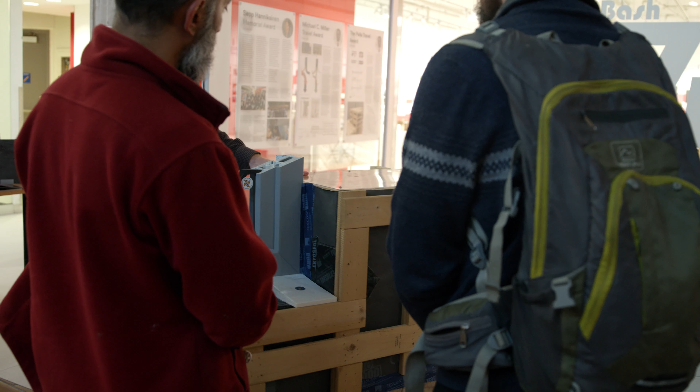Today, I'll be presenting some of my master's research, evaluating Energiesprong retrofits for solid masonry townhomes in Toronto.

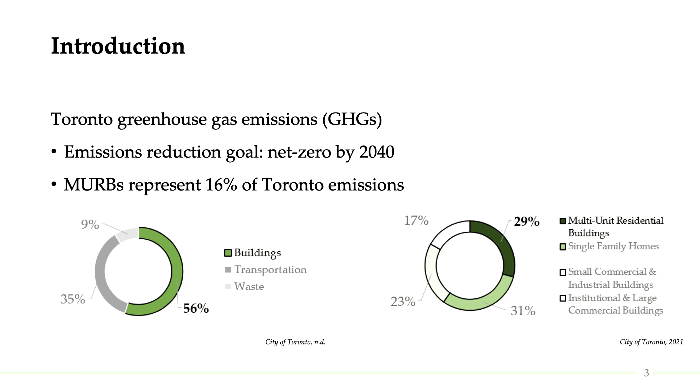From the building sector's consumption, primary energy consumed stems from necessities such as space heating, cooling, and ventilation. The energy sources for these uses are generally either electricity or natural gas.

In 2019, 92% of the province's electricity was produced by non-fossil fuel sources, primarily by nuclear generation, which accounted for 59%. However, nuclear-generated electricity production will slow significantly in the coming years, as many of the province's nuclear generating stations require refurbishment or are at the end of their service life.

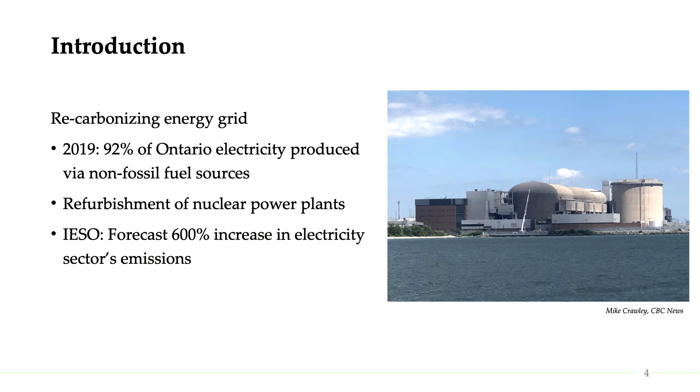The Pickering nuclear generating station shown here is a prime example, as refurbishment will stop its energy generation, thus negating the 14% of Ontario's energy it would normally supply.

Putting this all together, what could this mean for the City of Toronto? The building sector is responsible for such a significant portion of the city's GHG emissions that it's evident one target area to focus on is the building sector's energy consumption. Unless this is done, there is a risk of the Greater Toronto Area's emissions increasing by 2.25 megatons of CO2 equivalents per year. This will undoubtedly represent a step backwards in Toronto's path to net zero.

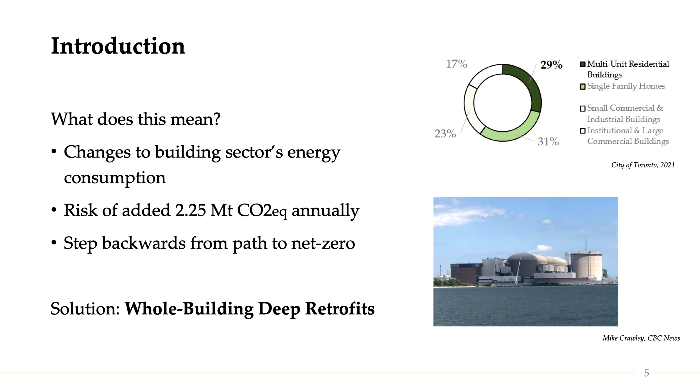So what's one possible solution to consider? You all know it, it's deep retrofits. I know I'm preaching to the choir, but let's talk about deep retrofits for a second. To reduce the amount of energy consumed from the built environment, deep energy retrofits are often implemented to improve a building's performance.

Typically, deep energy retrofits target energy consumption reductions of at least 50% or more. However, widespread adoption of deep retrofits has been limited because of factors such as extensive disruptions or high costs. On the other hand, conventional retrofits often include partial renovations or isolated upgrades to the building, achieving up to 25% energy consumption reductions. These smaller scale retrofits are usually prioritized by the general population due to shorter payback periods and limited disruptions to the occupants.

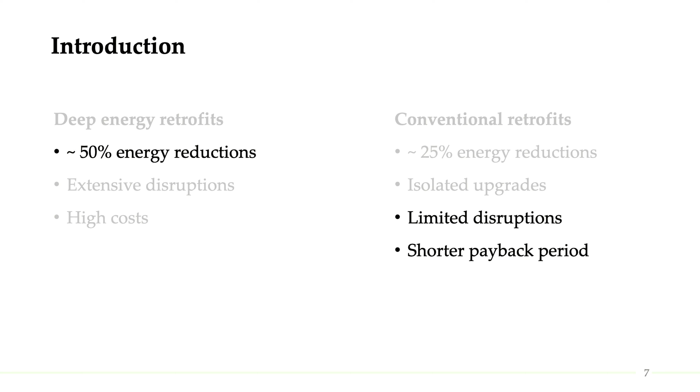In the end, significant and extensive improvements to our existing building stock must be completed to reduce our greenhouse gas emissions. The question then is, how can we prioritize a bit of both of these strategies, maximizing energy reductions while limiting occupant disruptions and creating economies of scale over time?

Enter the Energiesprong retrofit strategy. Energiesprong was started in the Netherlands with the overarching goal of industrializing the deep energy retrofit process at low financial cost while providing a high quality product.

This accelerated retrofit strategy utilizes prefabricated panels to enclose buildings in a super insulated envelope to reach net zero energy levels of performance with renewable energy systems. Given its prefabricated nature, on-site labor for an Energiesprong retrofit can generally be completed in 1 week of work, all the while remaining primarily on the exterior of the building, thus minimizing occupant disruption.

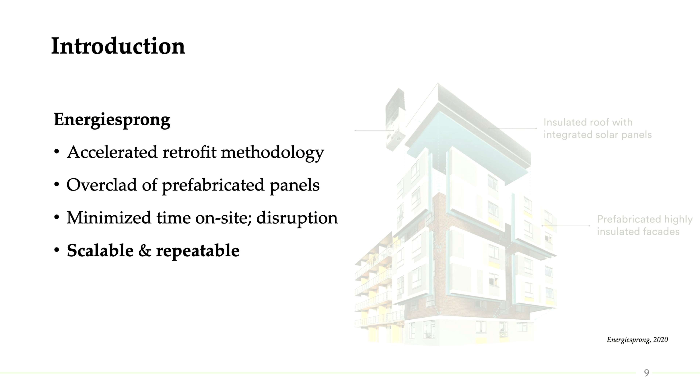The Energiesprong methodology, which has become popular in Europe, could serve as a basis for an existing building retrofit framework in Toronto that is both scalable and repeatable, crucial characteristics of the needed retrofit strategy for the city to reach its net zero goals. The Dutch Energiesprong model initially used social housing as its target market, the success of which could potentially be carried forth in Toronto.

Toronto Community Housing, the largest social housing provider in Canada, has a portfolio well suited for large-scale implementation of an innovative deep retrofit strategy. More specifically, TCH's low-rise solid masonry archetype lends itself towards panelized retrofits, as few geometrical variations must be accounted for, meaning they're simple box buildings. Furthermore, their existing low-rise MURB stock already requires significant repair and maintenance. The TCH portfolio could therefore serve as an ideal candidate for the beginning of mass Energiesprong retrofits in Toronto.

However, the overclad of solid masonry buildings would require proper study, as the masonry properties could significantly alter the wall's hygrothermal performance post-retrofit. This would not only impact the structure's durability over time, but poor hygrothermal performance of the envelope could result in loss of energy saving potential, as well as affect occupant health.

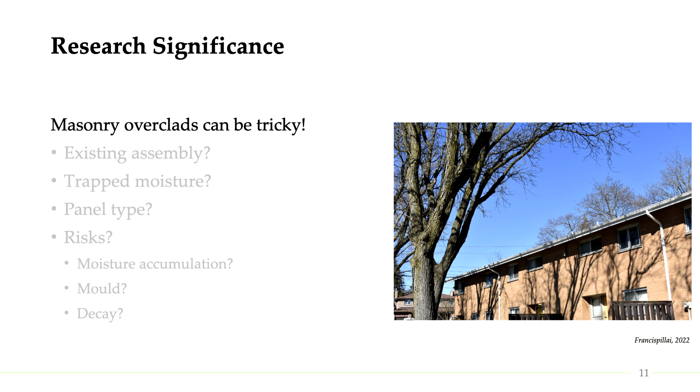There are many factors at play in this kind of retrofit, some of which are listed right here. Given the significant stock of this building archetype, it's important to know what kind of overclads are feasible and which ones are not. With all of this in mind, the following question guided a portion of my research.

How do masonry moisture storage, initial moisture conditions, and panel type affect the performance of panelized retrofitted wall assemblies for low-rise solid masonry residential buildings?

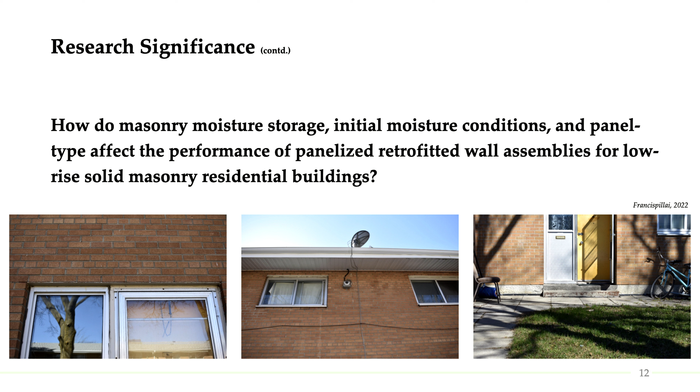The objective of this research was to help inform both Toronto Community Housing as well as the industry of the potential consequences of retrofitting solid masonry buildings using panelized approaches if various conditions are not accounted for adequately.

This would be demonstrated through the creation and testing of a hygrothermal performance sensitivity analysis methodology on a pilot building, namely a TCH low-rise solid masonry townhome.

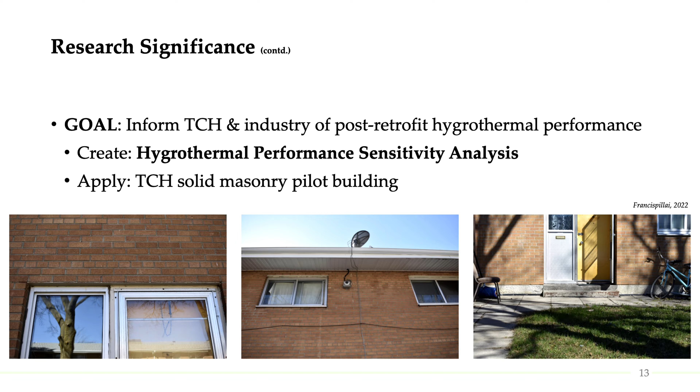All right, I know I spewed a lot of information, so let's do a quick recap. Toronto wishes to hit net zero by 2040. We therefore need to reduce our greenhouse gas emissions from the building sector, namely in MURBs.

TCH has a large stock of buildings that could be targeted, many of which are low-rise solid masonry ones. To both reduce costs of retrofits while limiting occupant disruption, the panelized Energiesprong approach should be considered. However, as with any retrofit, hygrothermal performance is of crucial importance for masonry retrofits. This is where the significance lies for the hygrothermal performance sensitivity analysis methodology that we created here.

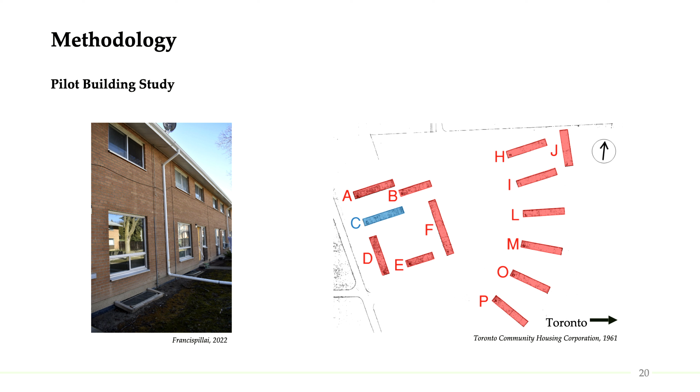So let's talk about the pilot building a bit. The building used as a test subject for this research is a 6-unit, 2-story townhome located west of Toronto. The pilot building, Building C, shown on the right, is a very similar design to that of a community surrounding it that belongs to Toronto Community Housing. The overall geometry of the building is quite simple, box-shaped with flat exterior walls.

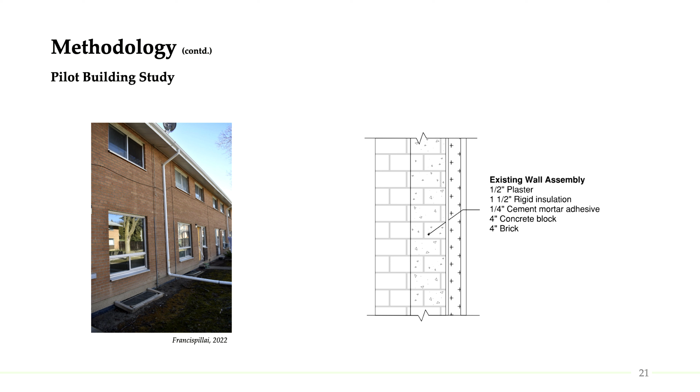The wall buildup is shown here and includes a half inch of interior plaster finish, 1.5 inches of rigid insulation, a quarter inch of cement mortar adhesive, 4 inches of concrete block, and a 4-inch brick finish.

To better understand the effects of panelized retrofits on solid masonry buildings, a methodology was created for modeling various overclad wall assemblies to analyze hygrothermal performance post-retrofit. The first step of the methodology is to define and understand the existing assembly being studied. In our case, the existing assembly is a solid masonry wall with a face brick and block backup.

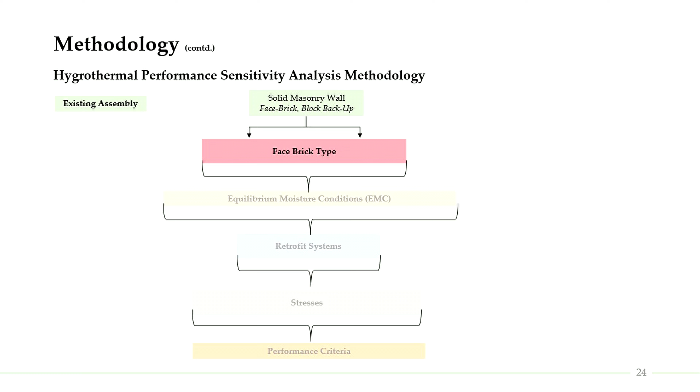Brick type serves as the second consideration in this methodology that we created. Solid masonry wall assemblies are known for their ability to store large quantities of water, as the sole water-shedding surfaces for these structures. For this reason, it was especially important that the type of masonry in question be studied, as all bricks generally possess a different moisture storage function. This will greatly impact the ability of the wall assembly to dry out over time.

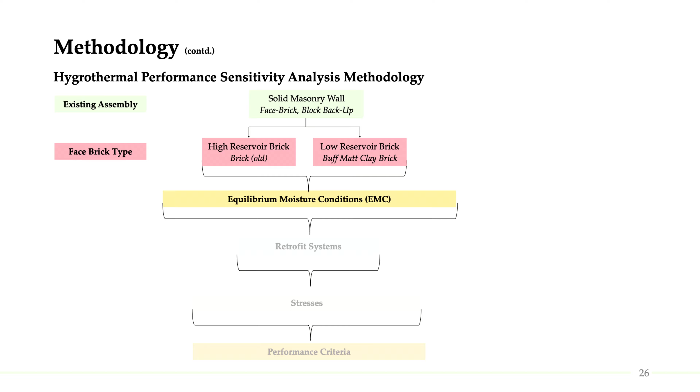EMC refers to the equilibrium moisture content of a material at a specific relative humidity. For instance, EMC 80 would represent the moisture content in the masonry at equilibrium with 80% RH.

It's important to vary this parameter. Industry often takes EMC 80 as its starting point for hygrothermal modeling, but industry experts have seen this number climb up to EMC 100 for masonry, which is an immense difference in terms of how much moisture is in the assembly.

For this reason, the brick masonry was simulated at varying initial moisture content levels. EMC 80 was tested given its industry normal use, followed by increasing EMC conditions until EMC 100. EMC 60 and EMC 70 were also modeled to determine if drier systems could achieve more favorable results in terms of hygrothermal performance.

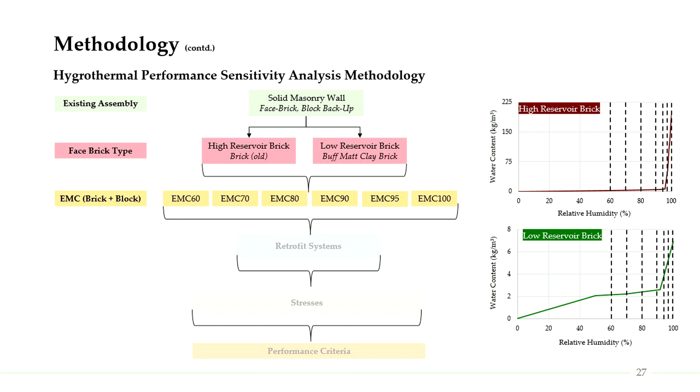Comparison of multiple panel types allows for contrasting between a desired panel and other industry standard panel types. Natural Resources Canada recently put out a guide to panelized retrofits and considerations. As outlined in that retrofit guide, panel-related factors that should be considered include the panel's outward drying potential, thermal resistivity, and embodied carbon.

Therefore, based on their differences in these three parameters, the use of a wood frame cellulose insulated panel was compared to the use of an EPS insulated SIP panel, or structural insulated panel.

To account for errors in construction, unforeseen climate events, and more, stressors are often added to the models to analyze how the assemblies react. Rain leaks behind the water-resistant barrier were tested for this research. ASHRAE 160 indicates a 1% rain load can be placed on the outside of a WRB as an added stressor. However, other research has shown that something more impactful could be the introduction of 1% or even 10% of that rain load directly placed in the outer sheathing. These two stressors were chosen for this research.

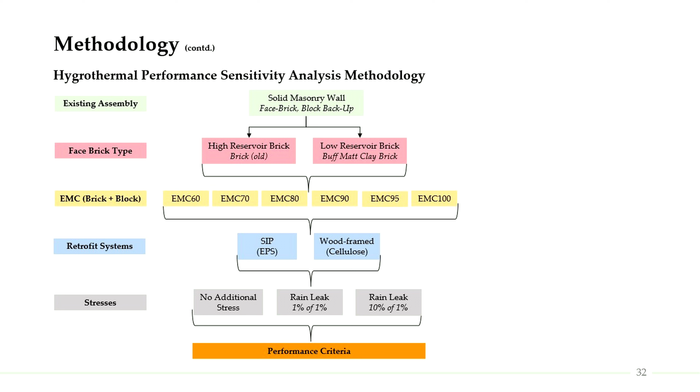Finally, to quantify the assembly's hygrothermal performance, criteria must be defined. This will allow designers to decide whether there exists real risk of failure of the assemblies over time. These models were studied for three things. Number one, moisture accumulation, meaning checking if there's accumulation of moisture over the simulated periods throughout the wall assemblies.

Number two, mold growth potential at key areas within the assembly's air barrier layer. And number three, decay, meaning checking if wood-based products experience higher than 20% water content over the simulated periods.

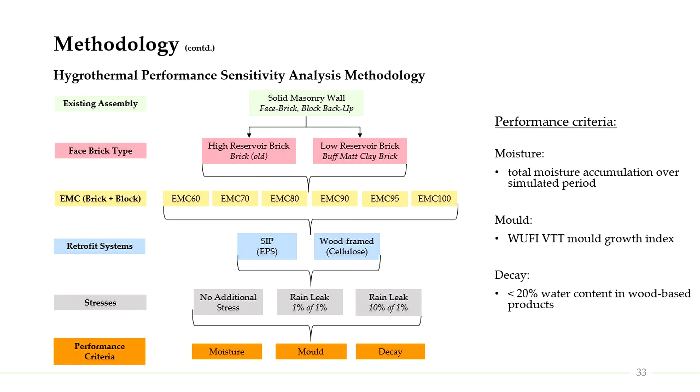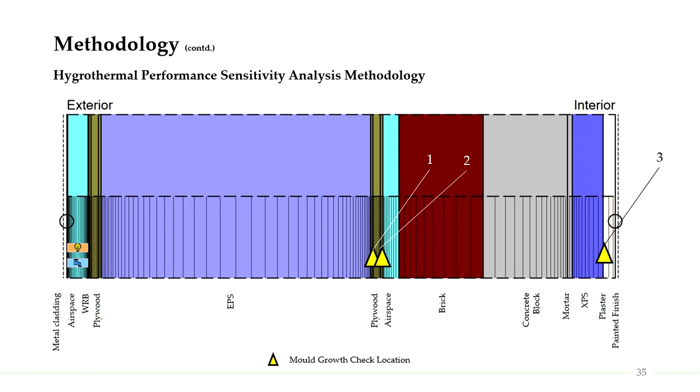Now the following slides have color-coded results of the hygrothermal sensitivity analysis based on whether the three performance criteria were satisfied or not. A green box indicates that the performance criterion was satisfied. A yellow box, used only for the mold criterion, indicates that there may be potential mold issues. And the red box indicates that the performance criterion was not satisfied.

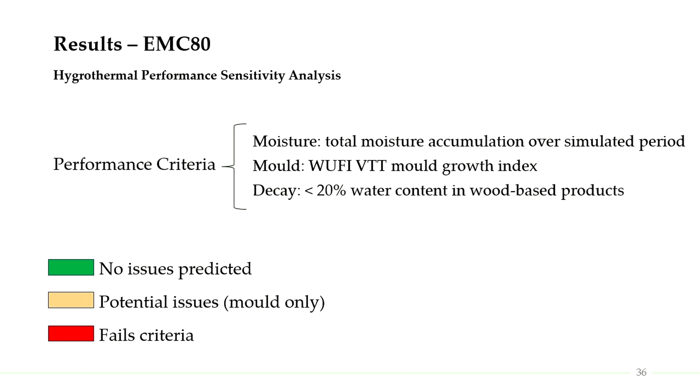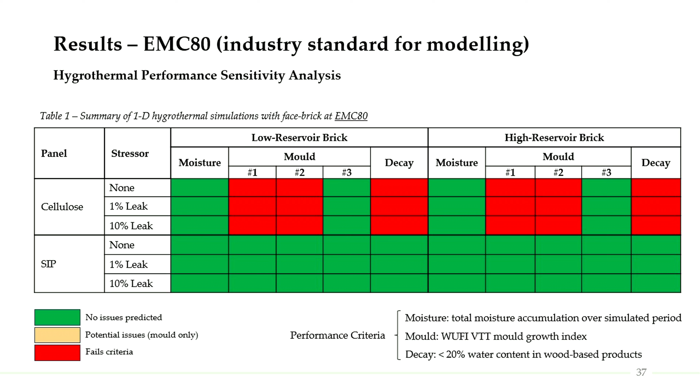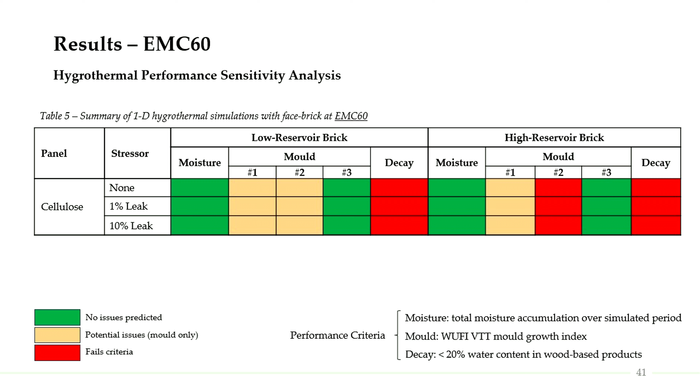Now, when conducting mold checks, you have to define how sensitive the material under study actually is in WUFI. Is it sensitive, very sensitive, not at all sensitive, etc.? In my literature review, I noticed that there is some potential for cellulose insulation to impart mold-resistant properties to adjacent construction materials, such as the wood sheathing or studs, due to the chemicals that are imbued in the cellulose insulation.

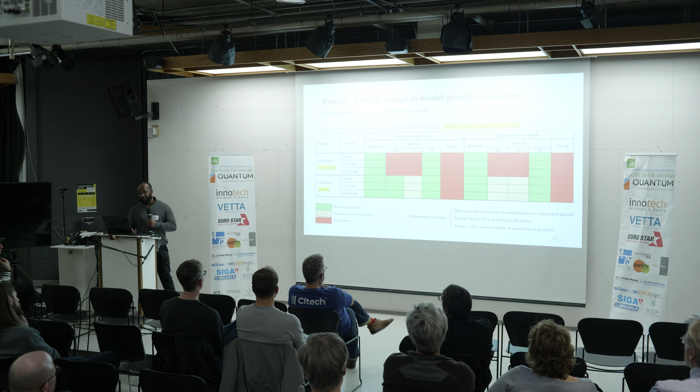Therefore, if I were to change the input for mold growth potential on these wood surfaces from very sensitive to just sensitive, the results for mold growth would change significantly, from failing the performance criterion, as seen in the upper half of the chart, to having potential issues or no issues at all, as shown in the lower half.

So, let's go back and take a look at our research question. How do masonry moisture storage, initial moisture conditions, and panel type affect the performance of panelized retrofits for solid masonry buildings?

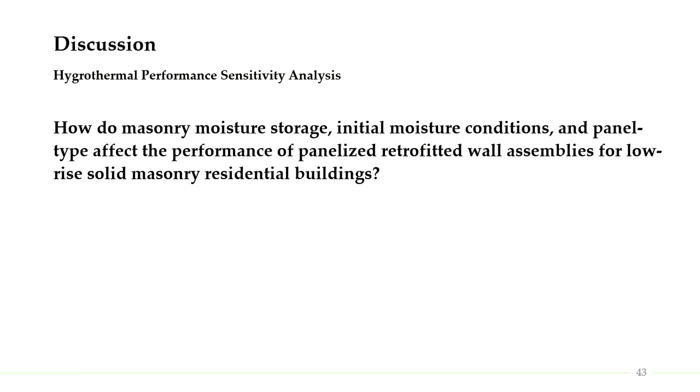As a summary of the hygrothermal performance sensitivity analysis that was created, let's take a look at some of the outcomes we've observed. The simulations conducted demonstrate that the type of brick affects the amount of moisture in the system and how quickly the performance criteria fail. Higher reservoir brick can hold higher amounts of moisture pre-retrofit, which can either be trapped and/or cause potential issues post-retrofit. Lower reservoir brick doesn't hold as much moisture, so we observe less issues overall.

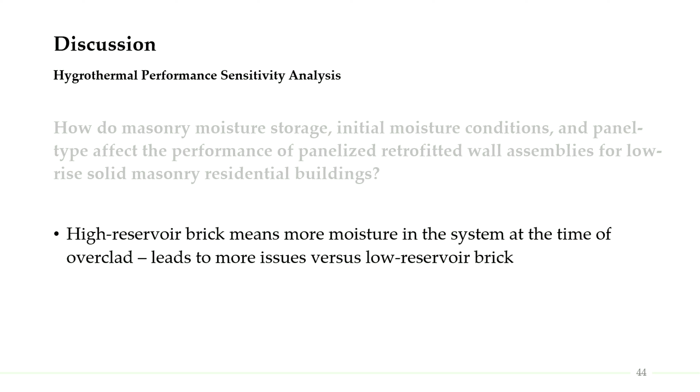While the EMC 80 starting condition is the industry norm for hygrothermal modeling, even this initial condition demonstrates potential issues within the panel overclad strategy with cellulose.

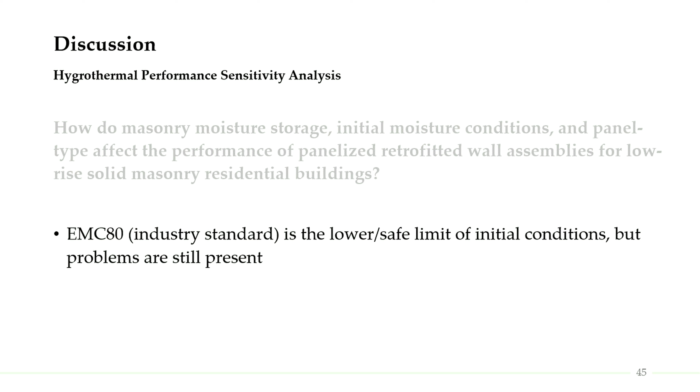In all cases, the cellulose panel simulations demonstrated higher than 20% water content in wood-based products, regardless of the EMC condition. On the other hand, if these wood-based products were substituted and the cellulose was shown to impart anti-mold growth properties to adjacent materials, like I showed in the last chart, the cellulose panel could be a viable solution at lower EMC conditions.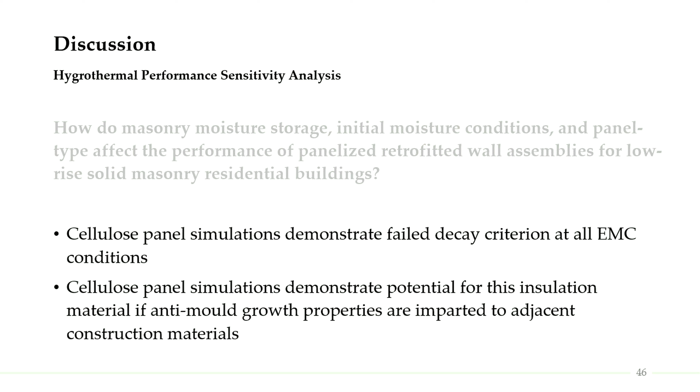Meanwhile, in general, at lower EMC conditions, the SIP panel demonstrates less issues compared to the cellulose-based panel.

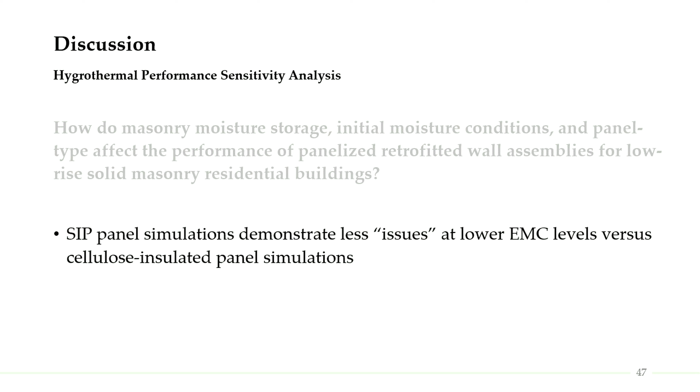For research, this work emphasized the importance of proper study of solid masonry overclads with prefabricated panels. While significant energy savings can be achieved through the Energiesprong retrofit strategy, it's crucial that proper consideration be given to the post-retrofit hygrothermal potential of the assemblies. Brick type, initial moisture content, and panel type have been shown to significantly impact the outcomes of the 3 performance criteria studied and should be carefully examined for the exterior panelized retrofit of all solid masonry buildings.

For Toronto Community Housing, this research served as a preliminary study of the retrofit potential of a solid masonry townhome, one of many of this archetype. With the abundance of this building type throughout their portfolio, the results presented in this research could help inform TCH about the feasibility of applying the Energiesprong retrofit strategy more broadly. This could serve as a catalyst for the deep retrofit movement that must occur throughout the City of Toronto and beyond.